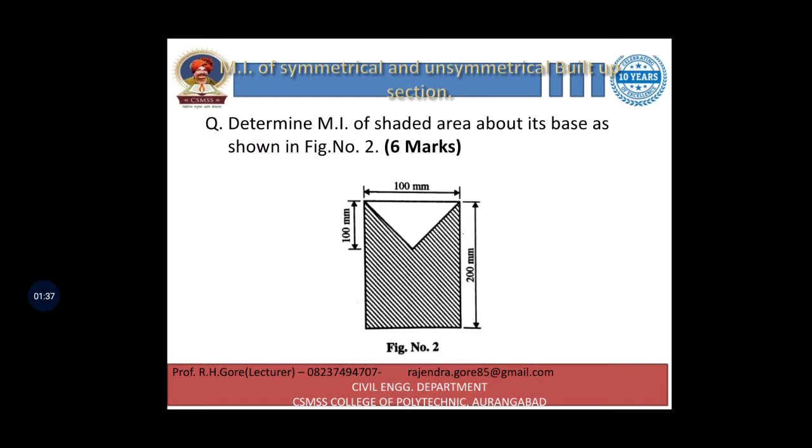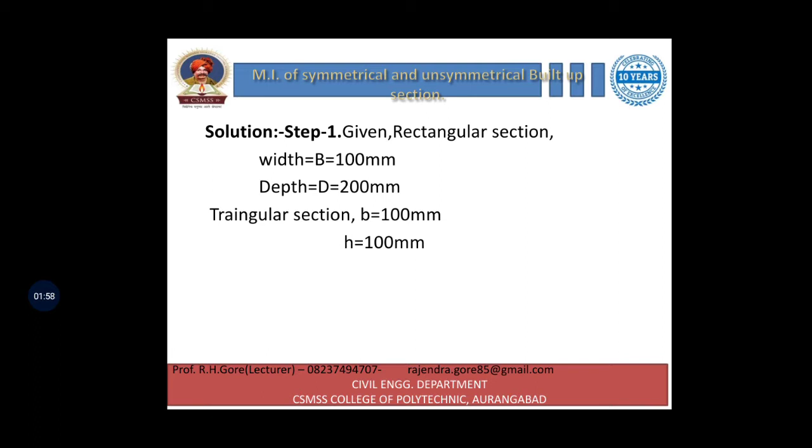Okay, so first, solution. Step number first, given rectangular sections. Width of rectangular section is denoted by capital B, 100 mm, and depth 200 mm. And triangular section, small b 100 mm and h, height of triangle, is 100 mm. And we have to find out the moment of inertia of shaded area about the base of sections.

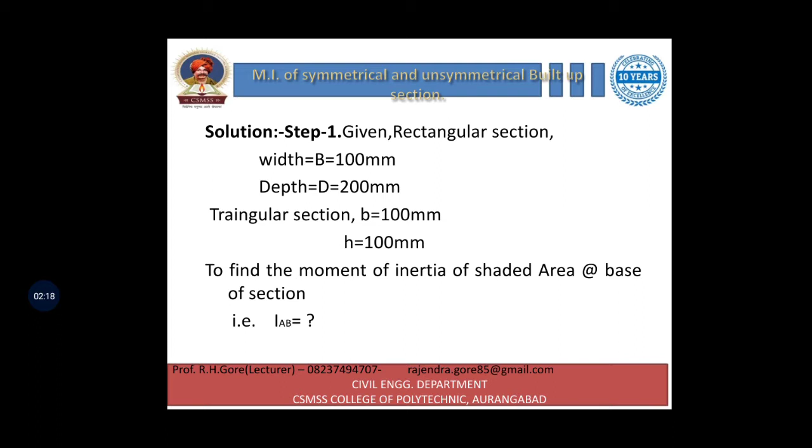That is, we are considering this at base there is AB axis and we have to find out the moment of inertia about this AB axis. So these are the rectangular sections, and the triangular portion like this we cut out from it, and for the remaining portion of the rectangular section we have to find out the moment of inertia.

So simply we are going to find out the moment of inertia of these rectangular sections about the base and moment of inertia of this triangular section about the base of these rectangular sections, and by subtracting, moment of inertia of rectangular sections minus moment of inertia of triangular section, we will get the moment of inertia of shaded area or remaining rectangular sections.

So these are the given figure. Having width of rectangular section 100 mm, width of triangular section also 100 mm, depth of rectangular section 200 mm and the height of triangular section 100 mm. So from the apex of the triangle the remaining portion up to the AB axis is 100, because total is 200 mm. So 200 minus h, the height of triangular section, so remaining portion is 100 mm.

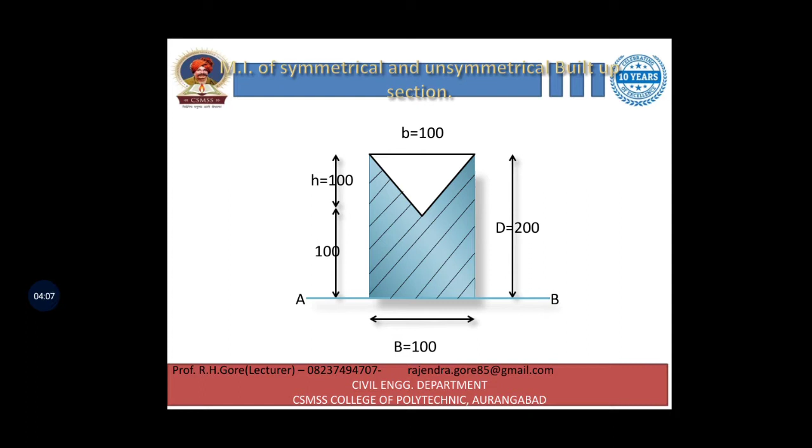Okay, so we have to find out the moment of inertia of these rectangular as well as triangular sections about the baseline AB. So first we find out the moment of inertia of the rectangular section about AB line by using parallel axis theorem. So step 2, to find out the moment of inertia of shaded area about the base AB: it is equal to moment of inertia of rectangle about AB minus moment of inertia of triangle about AB.

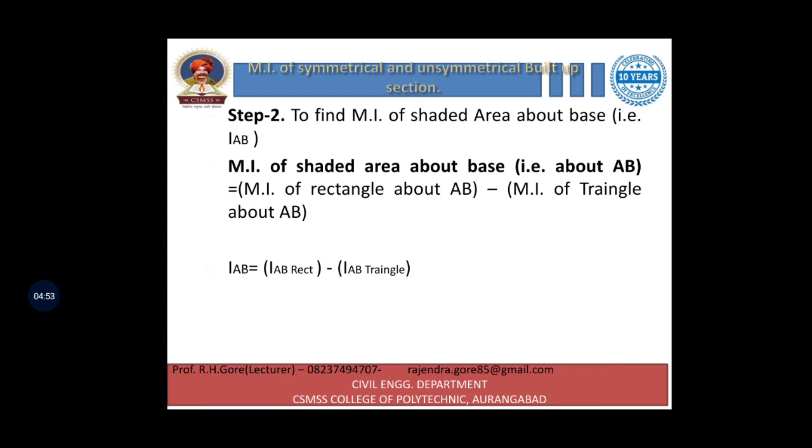So IAB, moment of inertia of shaded area about AB axis, is equal to IAB rectangle minus IAB triangle, meaning moment of inertia of rectangular section about AB minus moment of inertia of triangular section about AB axis. So moment of inertia of a rectangle about AB, by using parallel axis theorem, IAB of rectangle is equal to Ig plus Ah². Ig is moment of inertia of rectangle about its CG.

A is area of section and H is distance between these two axes, means CG of that rectangle and AB axis. This is the H distance. So Ig is equal to BD cube by 12. So B is 100, depth is 200, cube by 12. So moment of inertia of a rectangle about its CG is 66.667 into 10 to the power 6 mm power 4.

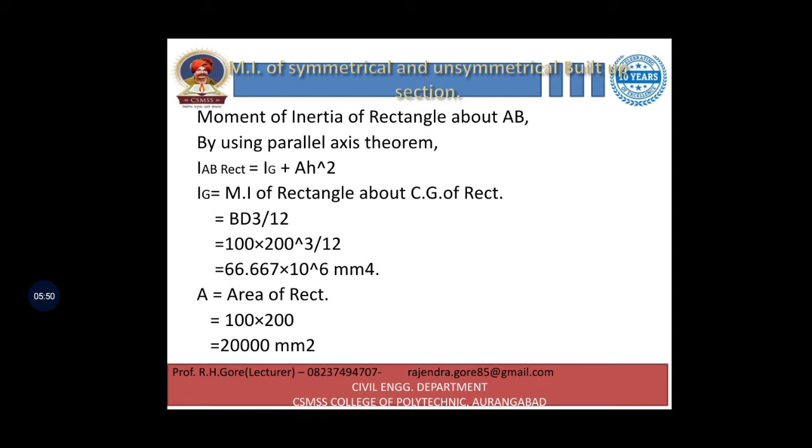And the area of rectangle is B into D. So 100 into 200 is 20,000 mm square. So in figure there is rectangular section, B 100, depth is 200, and we have to find out the moment of inertia about AB line. So here we can see the H distance is denoted. So distance between XX axis, means CG of rectangular section, and AB axis is H distance.

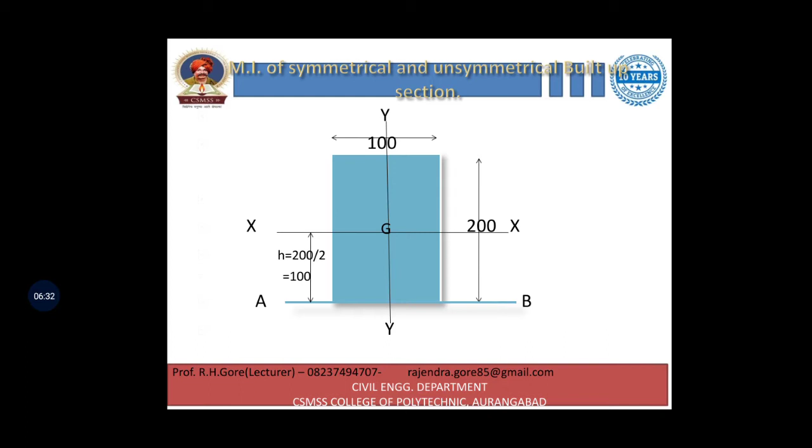So total depth of rectangular section is 200. So CG of rectangular section lies from the base at D by 2. So 200 by 2 is 100 mm. So H is 100 mm. So put in this value. IAB of rectangle is equal to Ig plus AH square. Put in this value, we will get moment of inertia of rectangular section about AB axis is 266.667 into 10 to the power 6 mm power 4.

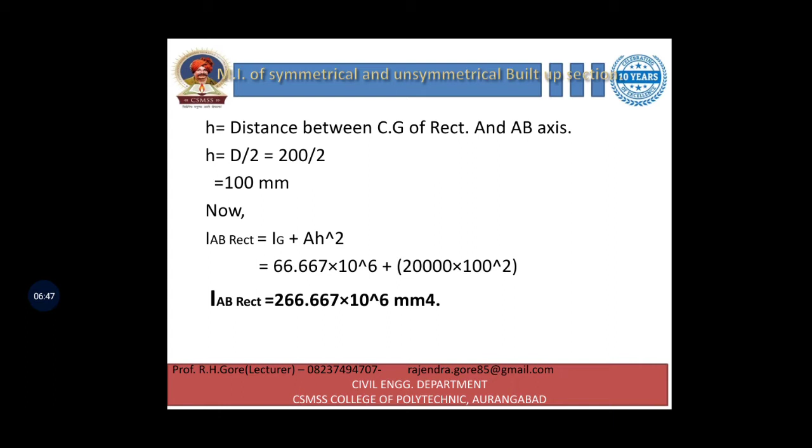So now similarly, moment of inertia of triangular section about the AB axis. So by using parallel axis theorem, same way, IAB of triangle, means moment of inertia of triangular section about AB axis, is equal to Ig plus AH square. So Ig is moment of inertia of triangle about its CG. A is area of a triangle and H is distance between CG of a triangle and AB axis.

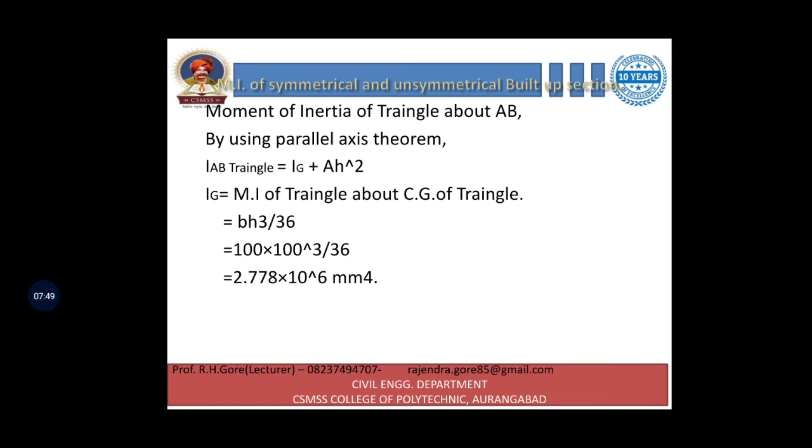So moment of inertia of triangular section about its CG is BH cube by 36. So width of triangle is 100 mm and H, height of triangle, is also 100 mm, cube by 36. So Ig of triangle is 2.778 into 10 to the power 6 mm power 4. Here we can see the triangular portion only, and the distance from AB axis to apex of a triangle is 100, and H is 100 mm, means height of triangle, and width of triangle is also 100 mm.

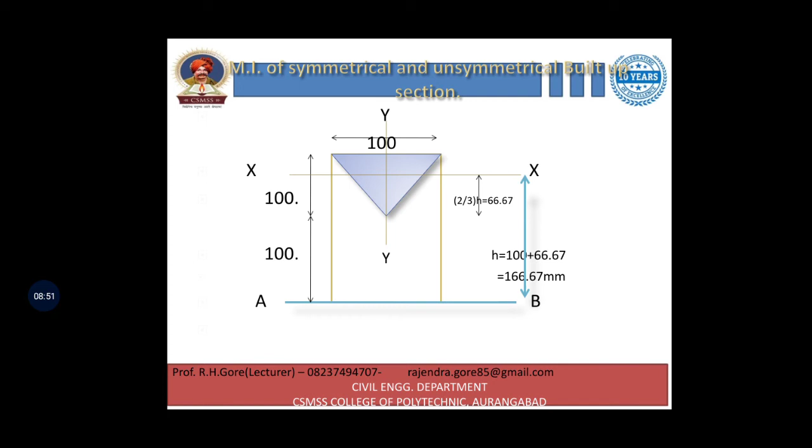So the CG of a triangle lies from the apex at 2/3 of H, means 2 by 3 into H, height of triangle. So CG is 66.667 mm from the apex. So the distance between CG of a triangle and AB axis is 100 plus 2/3 of H. So 100 plus 66.67 is 166.67. This is the distance between these two axes. We can use this distance in parallel axis theorem.

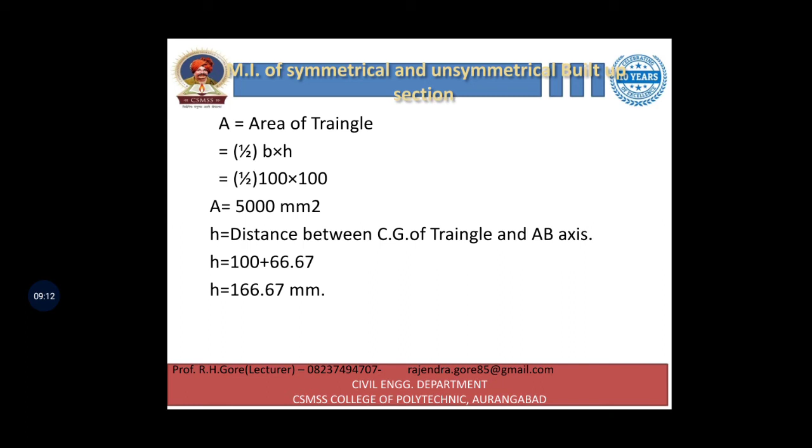Okay. So A is area of triangle, half base into height. So half, B is 100 and H is also 100. So area is 5000 mm square. And H is the distance between CG of triangle and AB axis, so 100 plus 66.67 is 166.67. Put this value in parallel axis theorem, we will get the moment of inertia of triangular section about AB axis. So Ig is 2.778 into 10 to the power 6 plus area 5000 into H 166.67 square. So moment of inertia for triangular section about AB axis is 141.672 into 10 to the power 6 mm power 4.

So the total moment of inertia of the shaded area about the base, or about the AB axis, is moment of inertia of rectangular section minus moment of inertia of triangular section about AB axis. So 266.667 into 10 to the power 6 minus 141.672 into 10 to the power 6 mm power 4. So moment of inertia of shaded area about the base is 124.995 into 10 to the power 6 mm power 4.